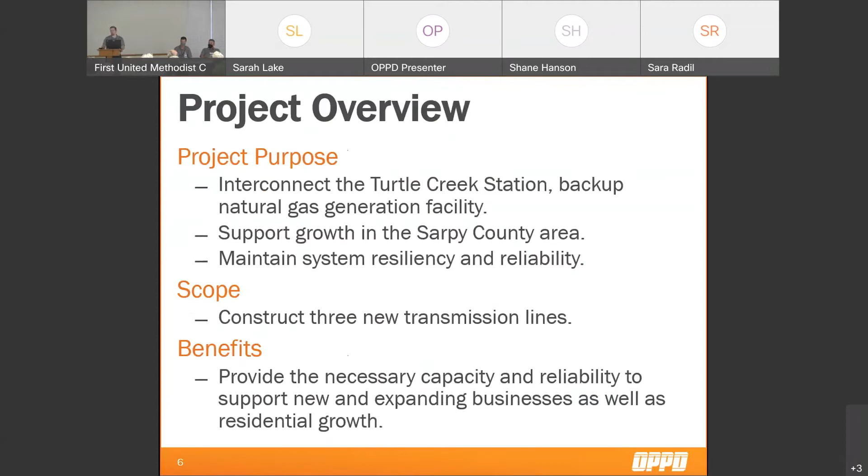We announced that route in May 2021. And since then, here's where we're going and where we've been.

Since that route announcement at the May 2021 Board of Directors meeting, we've been working through engineering, preliminary right-of-way activities, and some preliminary environmental activities that helped us determine the alignments—which side of road, which side of property lines, where structures could be placed based on the physical features of the properties themselves.

So obviously we're here today at the public hearing. Concurrently, we're working through procurement of some of our longer lead steel poles, and then we'll be moving into easement acquisition and construction shortly thereafter.

As we always say with these projects, all dates are something we're trying to nail down as best we can, but they are subject to change based on everything we experience as we go through these projects.

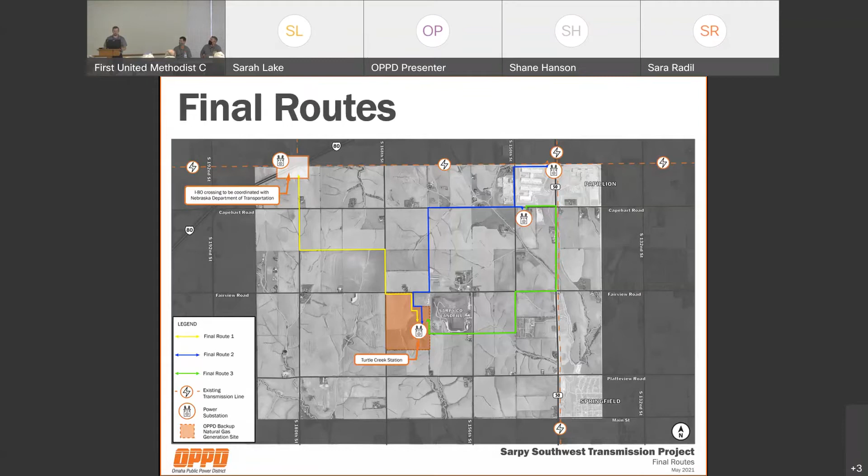Which brings us to today. As I was talking about in the timeline, those were the decisions that were really worked out as a larger project team over the last five months, leading up to this public hearing today.

So working with landowners on right of entry, seeing what physical features we had, allowed us to really go and spot these lines—which side of the road they should be built, which side of property lines make more sense for the overall line as a whole.

Again, this is not a process that we take lightly. We have a lot of subject matter experts in the room with us who help us hone in on what the best option is for the overall system.

And again, I know those who are here today may not feel the same way that this is the best option, but we do try to take into consideration all aspects of the effects these lines may have when these decisions are made—they are not taken lightly by any member of OPPD.

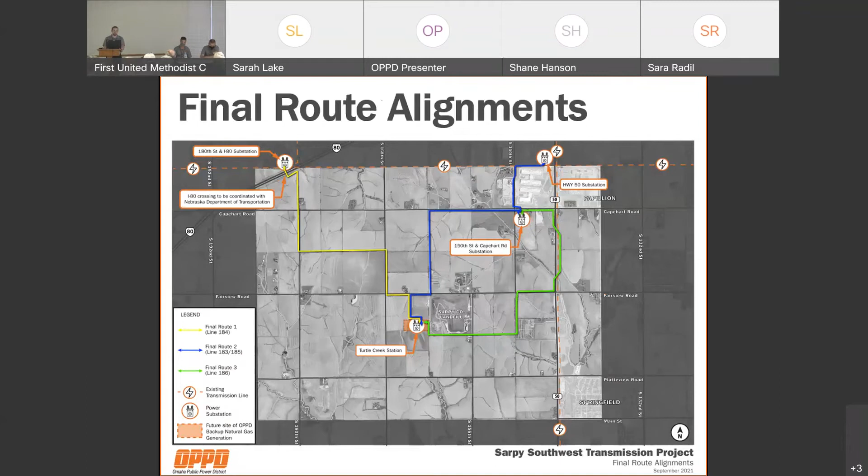All right, and with that, I am going to hand it over to Mark to walk through the easement acquisition process.

Thank you, Shane. So again, as Shane introduced, my name is Mark Pohl. I'm Supervisor of Land Management, Siting, and Records here at OPPD.

As Shane alluded to, OPPD follows Nebraska State Statute Article 25, which is specifically the uniform procedure for acquiring private property for public use. This hearing tonight is to inform you as directly impacted property owners that OPPD will begin starting negotiations with you in approximately 30 days for permanent easement on your property. I'd like to spend a little bit of time tonight talking about easements, talking about your rights throughout this process, and hopefully answering any questions that you may have.

For those of you in the audience, for those of you watching online, that will be directly impacted by this project, you should have received a certified letter from OPPD outlining our intent with regard to a permanent easement on your property. In addition to the letter, there should have been a tract map that specifically calls out the easement area and describes the proposed easement that is specific to your property.

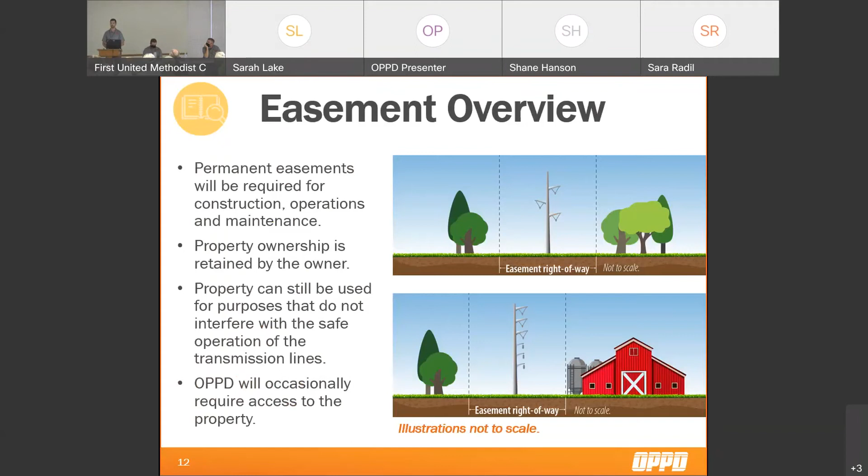From an easement valuation standpoint, with regard to this project, OPPD has hired an independent, certified, and licensed appraiser who's familiar with the Sarpy County area, in particular this part of Sarpy County, to establish an opinion of value for each property individually. Individual circumstances for each property are taken into account during this process to determine an amount that is fair and appropriate. We believe that hiring an independent appraiser allows for a process that is equitable and fair to all property owners across the board.

As far as easement negotiations go, OPPD wants to make sure that all of our directly impacted property owners understand the rights that you have during this process. We are very intentional about handling our negotiations with you in a very fair and transparent manner. And you have our commitment that as we are negotiating with you, we are attempting to arrive at a mutually satisfactory agreement with you.

Specifically, rights that you have during this process: as property owners, you have the right to negotiate with OPPD. You have the right to accept or reject any offer that is provided to you. Owners do have the right to be represented by an attorney if you so wish. That is not a requirement by any means, but it is within your rights to do so. You also have the ability to hire your own independent appraisal if you would like.

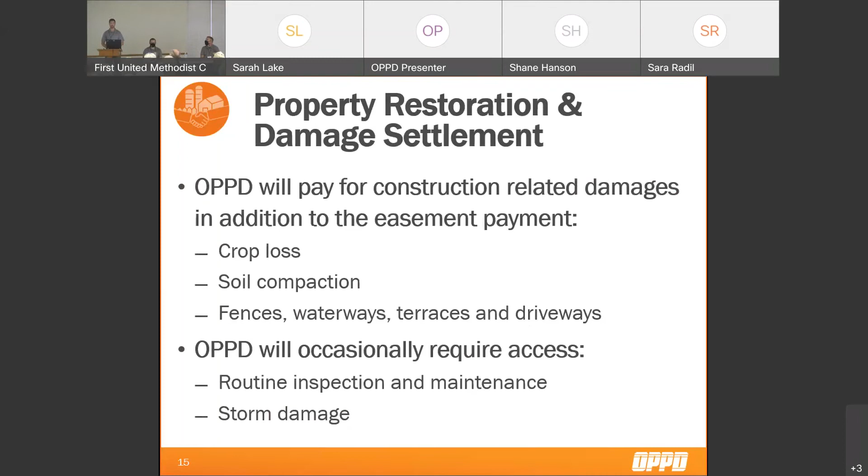With this, I'd like to turn it over to Brian Wall to talk us through the construction aspect of this project.

Thank you, Mark. As Mark and Shane said, my name is Brian Wall. I'm a senior engineer in the transmission engineering department, here to speak a little bit about the construction process. It's essentially a 5-step process with a final construction phase of cleanup.

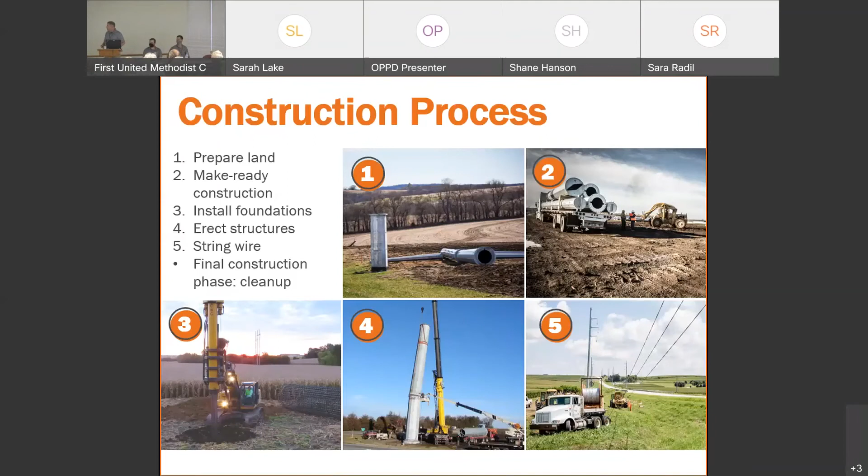The first step is land preparation. This is where OPPD and their partner construction contractor work to establish access to any vegetation removal locations and structure locations, particularly the ones that are difficult to get to. We would ask impacted landowners to actively participate in those access routes so we can limit damage and make it easy for everybody to get to and from the work sites. The partner contractor will remove vegetation at this time within the easement, including stumps, if there are any.

There's also something we call a danger tree - that's a tree that lies just outside of the easement, but if it were to fall, it could strike the power line. An example would be a 100-foot cottonwood 2 feet outside the right of way - it's obviously going to take down the transmission line. We would like to remove a danger tree like that. That will be determined by OPPD and ultimately removed by the partner contractor.

Some other topics of interest during this land preparation phase would be fences and gates that either need to be removed, repaired, installed, or maintained; erosion control measures; temporary culverts if necessary for access; and any livestock management concerns for grazing or similar issues. Planting and harvest seasons are also always a big concern to work around if possible. We do our best, but at times it can't be avoided.

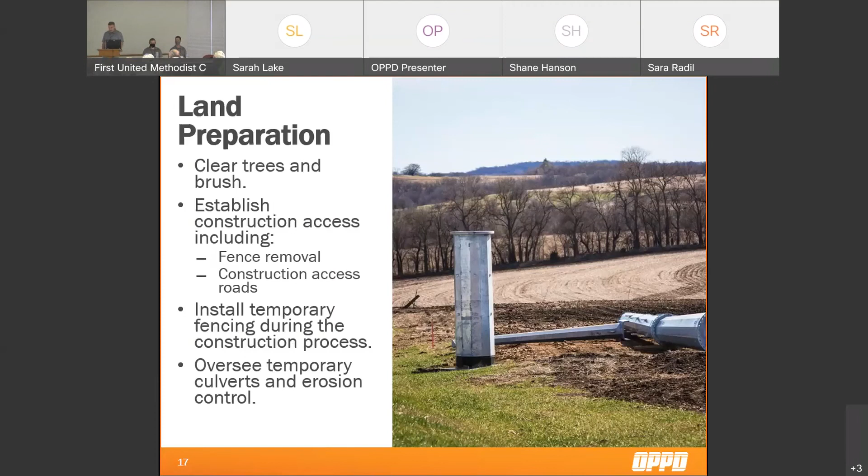Another thing we would do prior to the real construction is what we call make-ready construction. That's typically when we have to install brand new transmission lines, and sometimes have to move other existing facilities, whether it be distribution lines on the side of the roads or transmission lines, raising or lowering them. We call that make-ready. There won't be too much on this, but you'll typically see that ahead of the actual transmission construction.

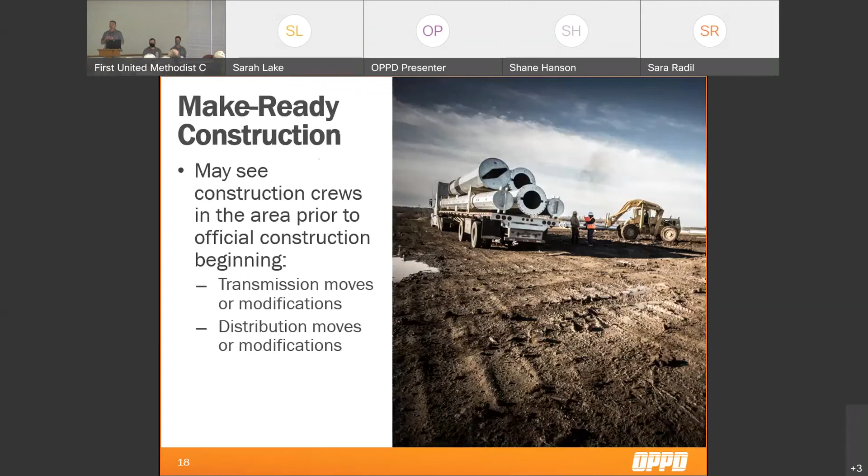The first major step of building the transmission line is installing the foundations. This is where the partner contractor will actually construct the foundation. OPPD will stake the pole locations. The contractor will call Digger's Hotline or One Call, and they'll do the flagging and painting for underground utilities, so those can be avoided.

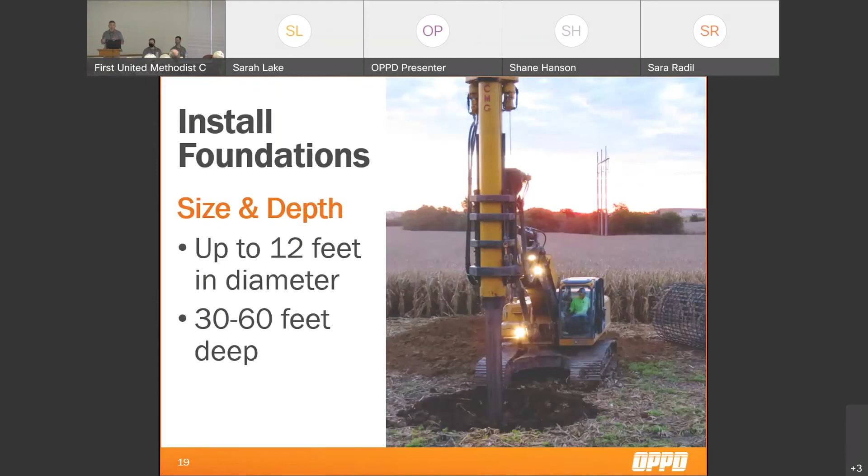The contractor would dig a hole, typically with a pressure digger such as this, set the rebar cage off to the right side of the screen. You can see the rebar cage, set that in the hole, fill the hole with concrete, and the soil that's removed, we'll haul that off in dump trucks. This is where you'll see most activity at each site. There's a lot going on during the foundation installation phase.

The next step is basically erecting the structures, where we'll haul, spot, and assemble each structure on site next to its foundation. Once the foundation's ready and the structure's ready, we'll lift and set the pole on the foundation, with quite a few cranes in some cases.

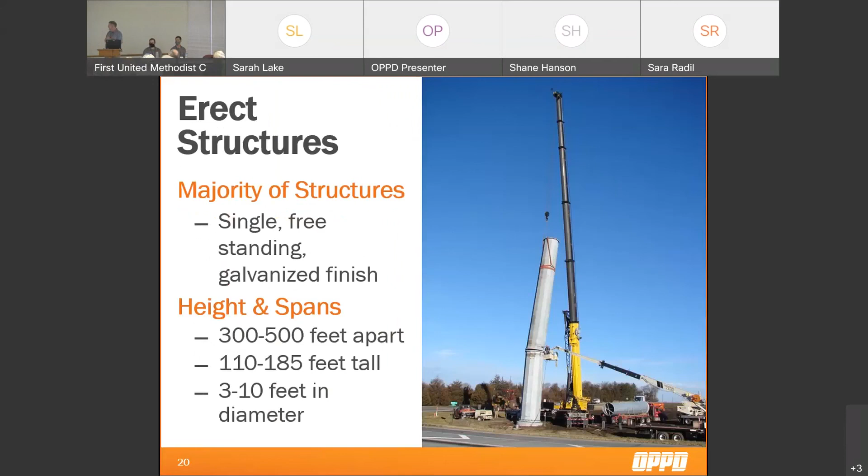The last major step would be stringing the wires. This is where we basically pull in all the wires that need to be installed for the transmission line. We'll have some wire setups similar to this throughout the transmission lines. Occasionally we have to get a temporary easement for these locations, and OPPD would be getting that. It wouldn't be the partner contractor doing that kind of work.

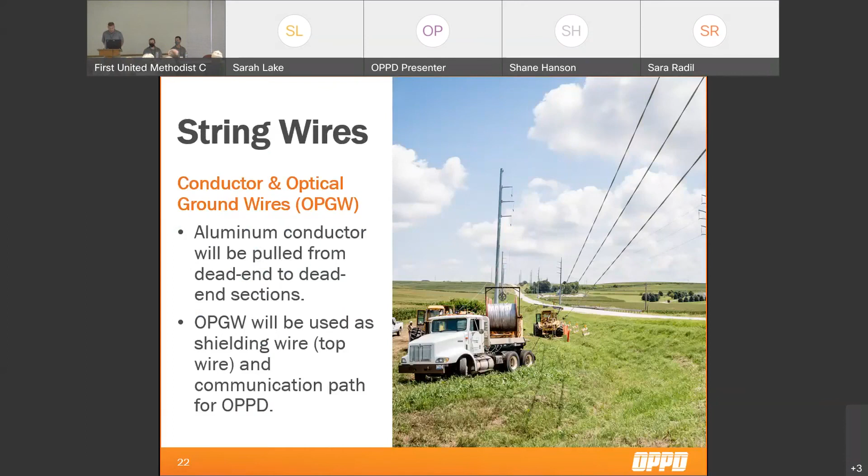The final cleanup step, and I want to say that doesn't mean we never clean up, we typically clean up as we're progressing through all these steps. We don't leave the right of way a mess between each of the steps. But there's always a final cleanup phase where we restore fences, do some minor grading in case there's any extreme ruts, and handle erosion control, either repairing or removing those. We might also do removal of construction debris and final vegetation debris. Also, at that time we would release any temporary easements that we needed to actually construct the transmission line.

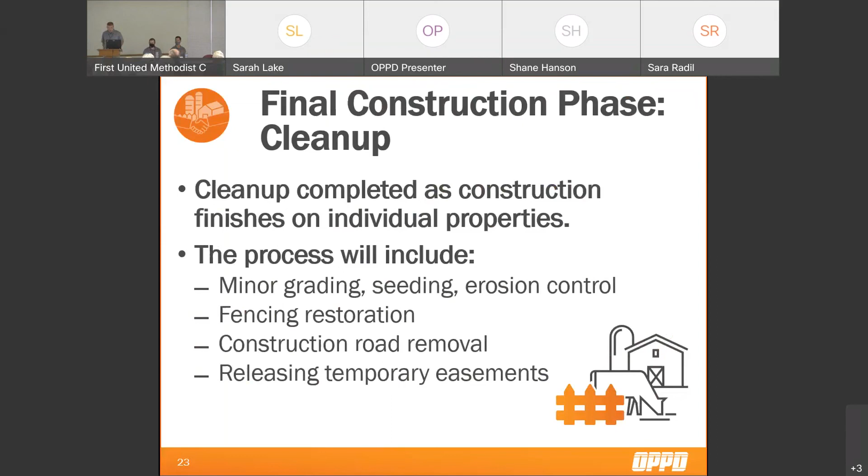And with that, I think we're back to Shane. Thank you.

All right, thanks Brian and Mark for going through that. Just one comment I'll add to Brian's final cleanup point: we do have a stormwater pollution prevention plan, or SWPPP as it's called. So when Brian said we clean up as we go, we are required to maintain any runoff or spoils from the site. We'll have an active plan on site, so at each step of the process we're making sure we're stabilizing any soils we disturb, or removing those spoils immediately following excavation.